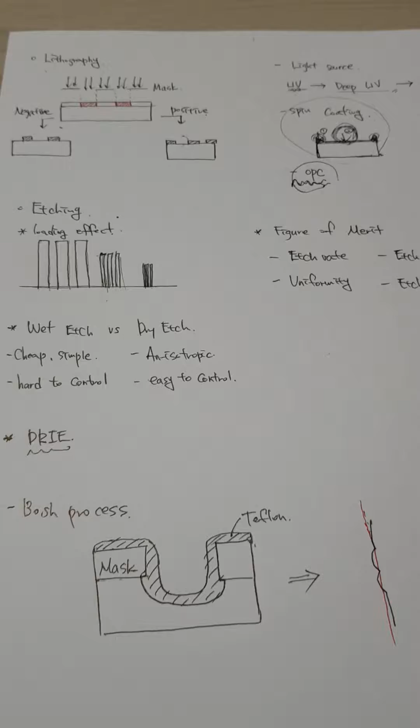Last week we learned about lithography and etching. First of all, in lithography, we use photoresist.

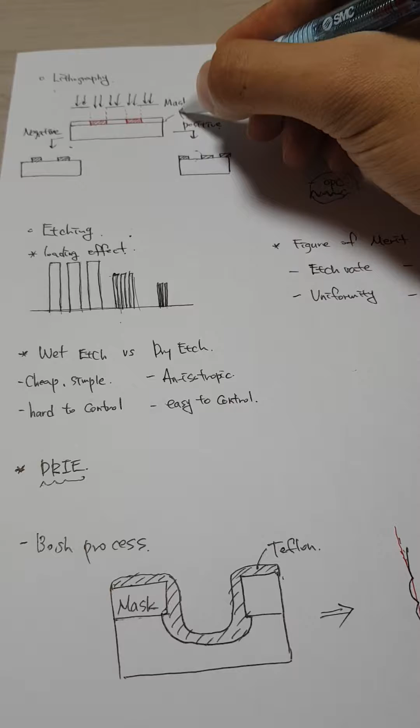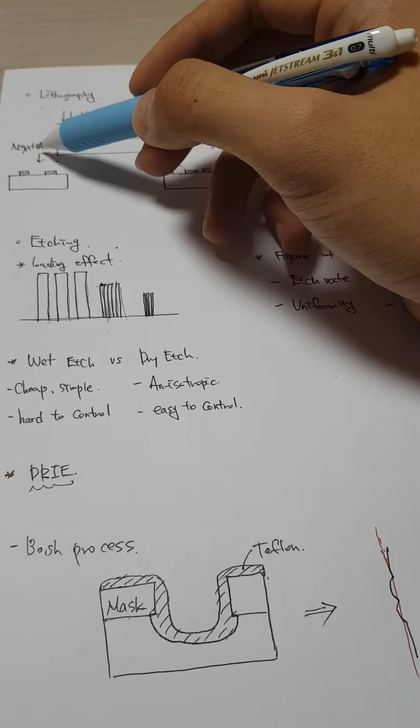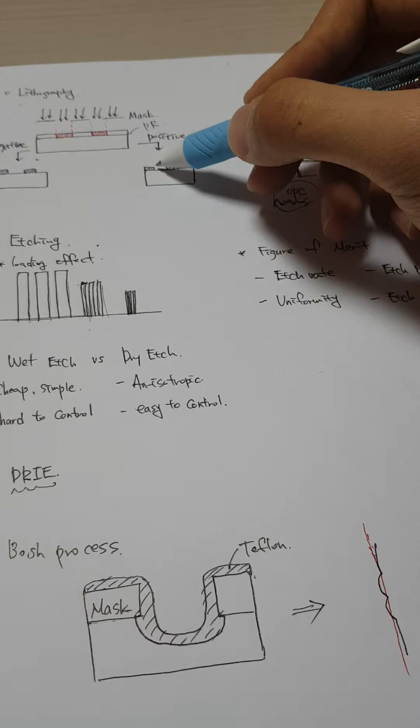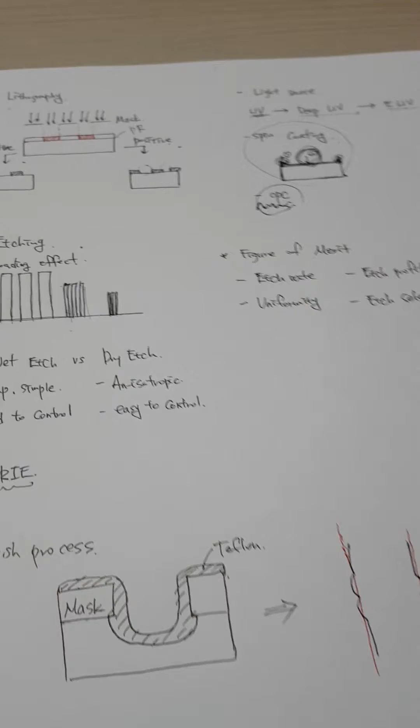In lithography, they are separated into negative lithography and positive lithography. We use negative here. It remains the right-hand part, while in positive PR, it remains the other part. Positive PR erases the right-hand part, and we also need to think about the light source.

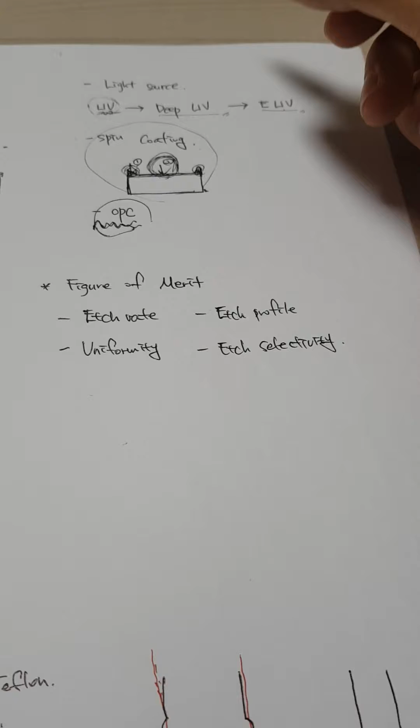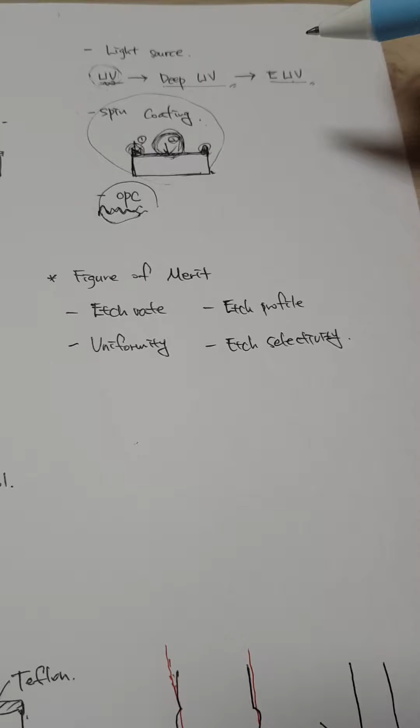A few years ago we used UV because we didn't have any technique to control UV, but we need to use low wavelength UV, so we use deep UV, and we will use EUV in one to two years.

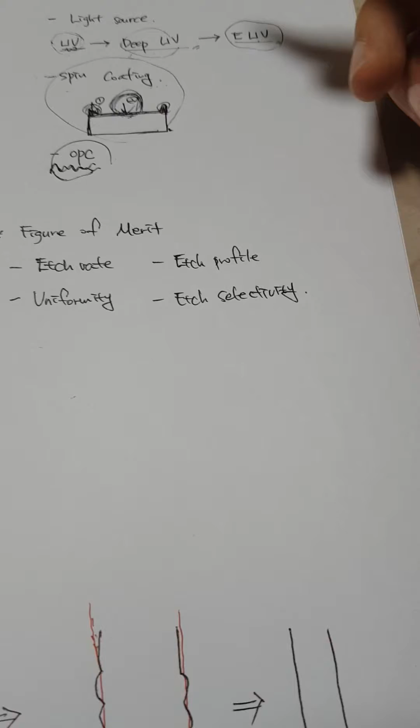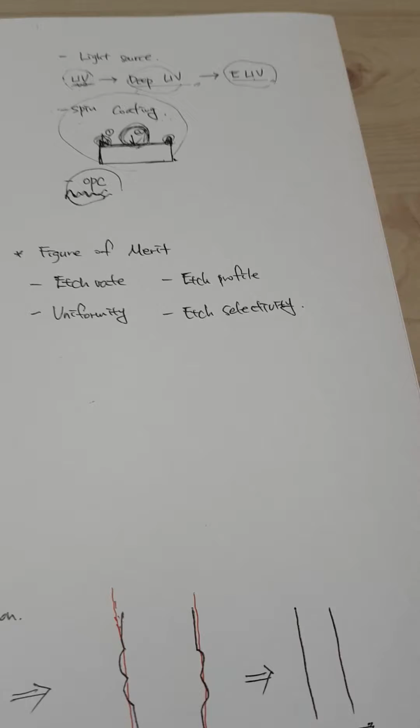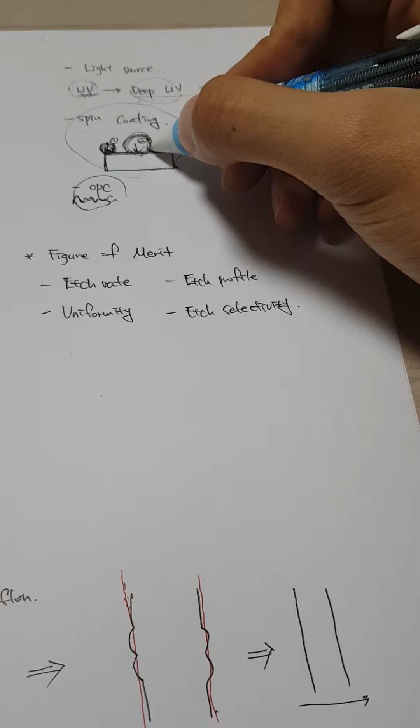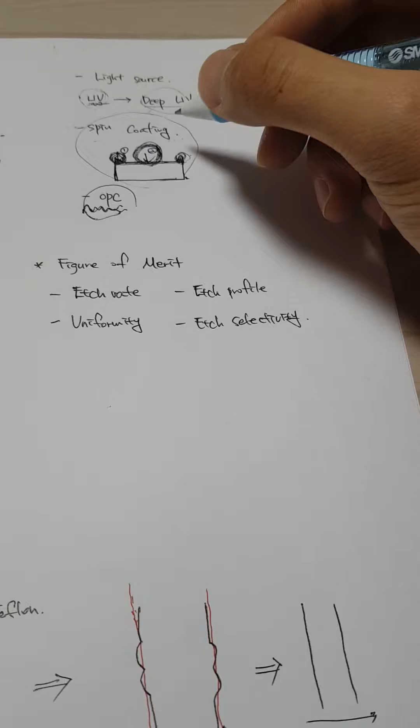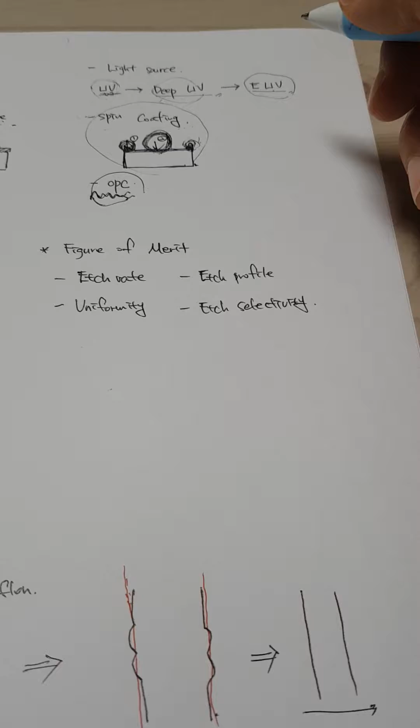Next is OPC. Because light has a diffraction effect, we need to think about optical proximity correction. Next is etching.

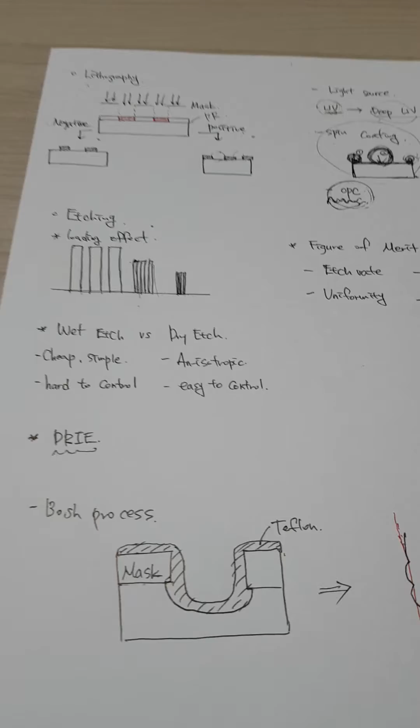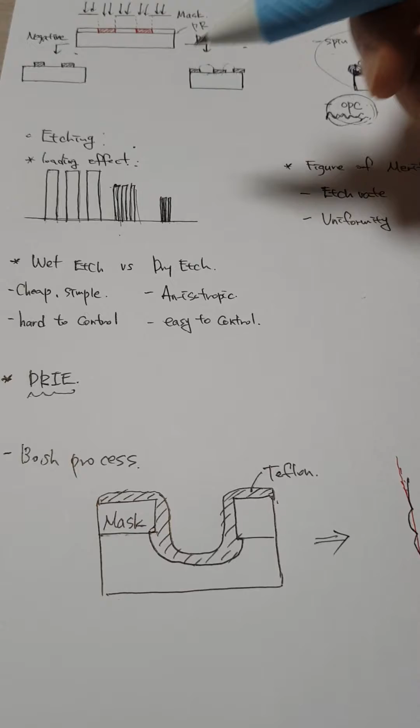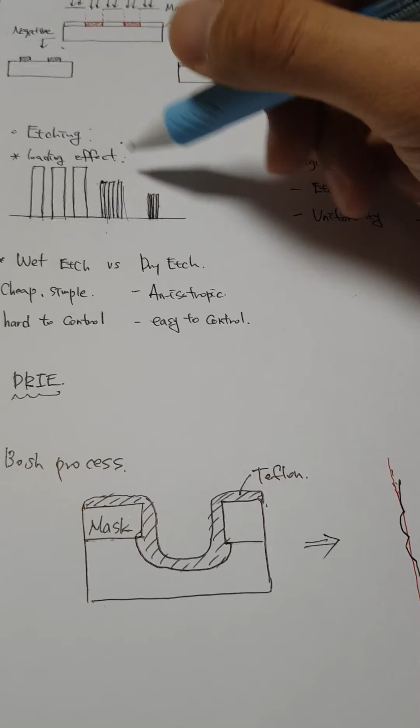In etching, there is a loading effect. Because we need smaller devices, we need smaller patterns. With smaller patterns, we have many difficulties, so there is a loading effect.

Next is the figure of merit of etching. We need to think about etch rate, etch profile, uniformity, and etch selectivity. There are two etching styles.

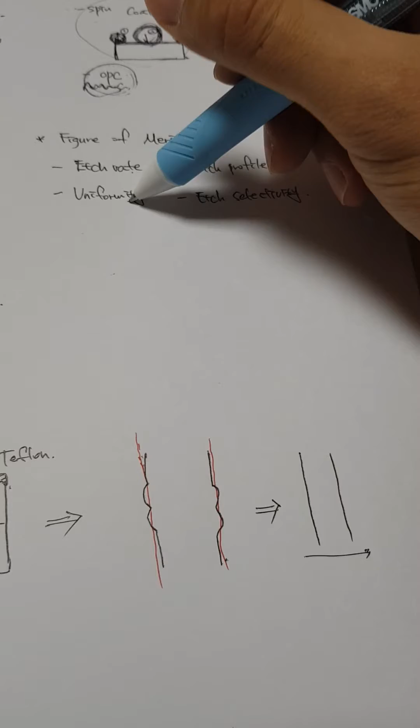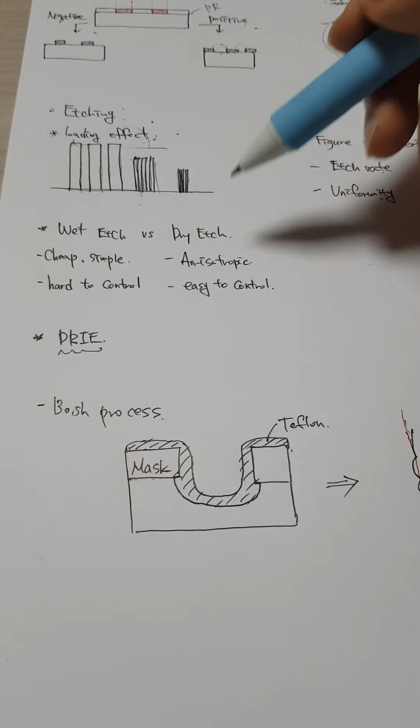One is wet etching, the other is dry etching. Wet etching is cheap and simple, but it's hard to control. Dry etching is anisotropic and easy to control.

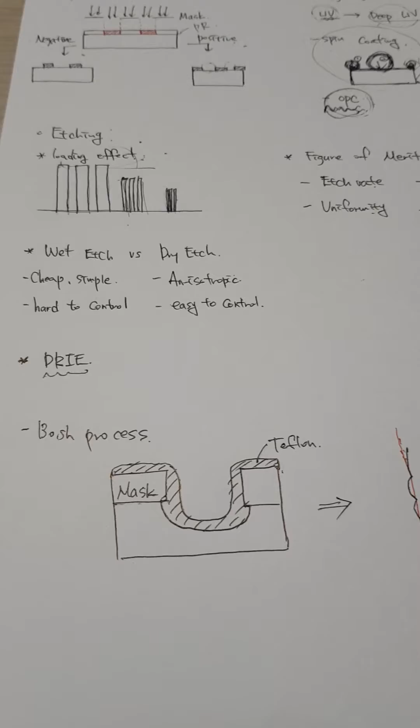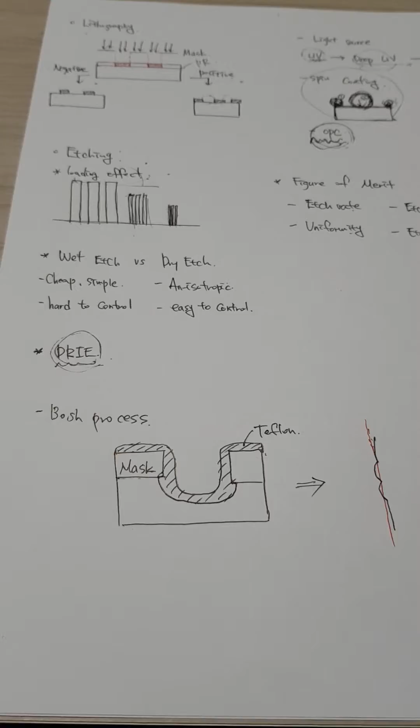As devices become smaller, we need DRIE, because we need deep trench or deep isolation, so we need DRIE. But there is one problem.

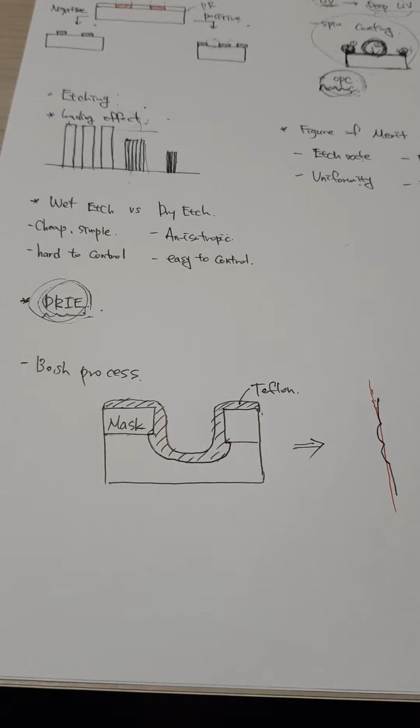Deep trench is too hard to control, so the solution we make is the Bosch process.

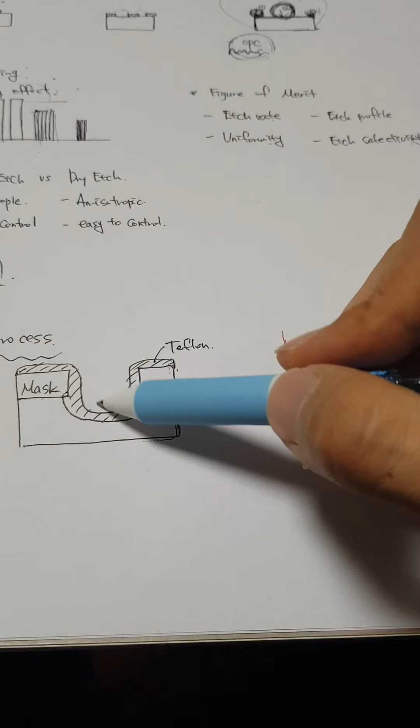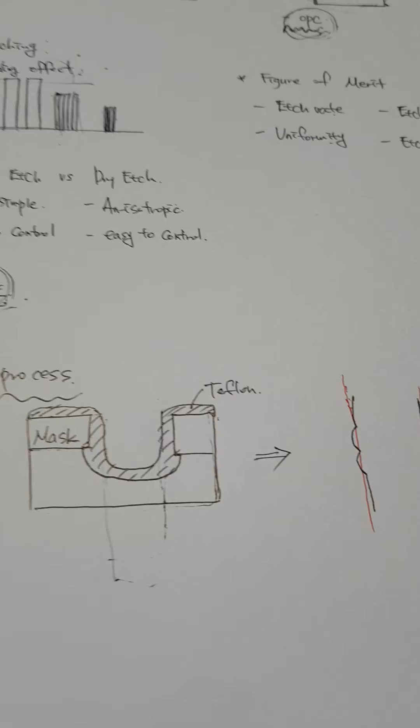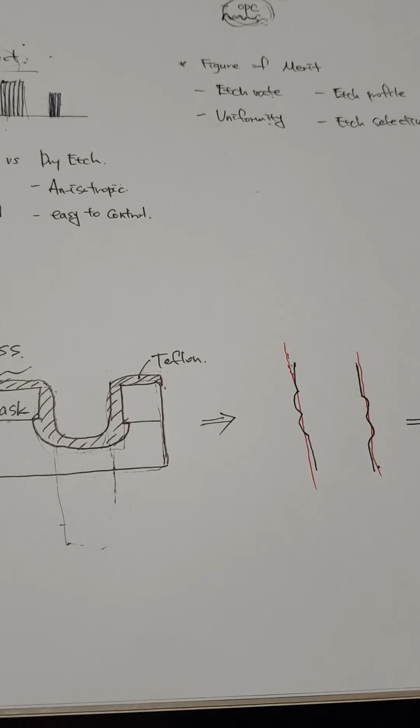When we etch something like this, as the trench gets deeper, we can't control other problems. So we etch one time, and cover with Teflon, which is strong against acid. So we do one-time etching with one-time cover, and one-time etching with one-time cover.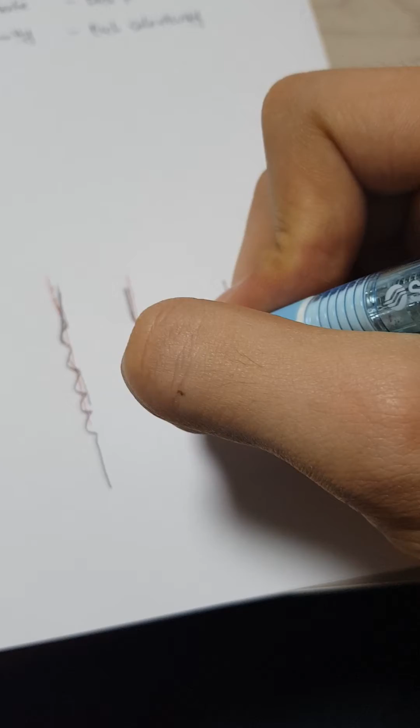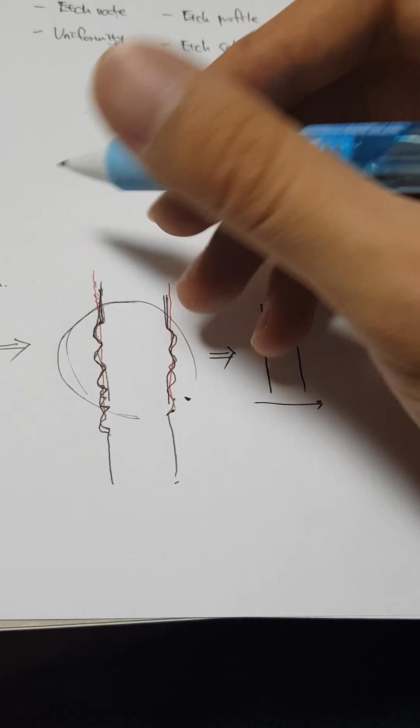So we make it like this, and it becomes curved. But it is a problem because it is curved, and it is bad for dissipation.

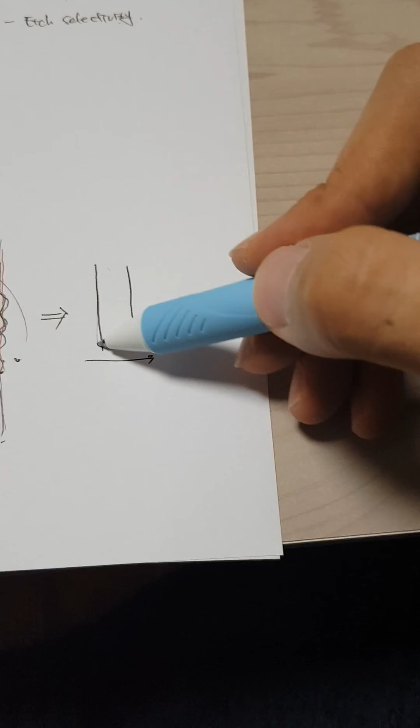So we cut it like this, so we have a flattened deep trench isolation. So it is an important technique for deep trench control.